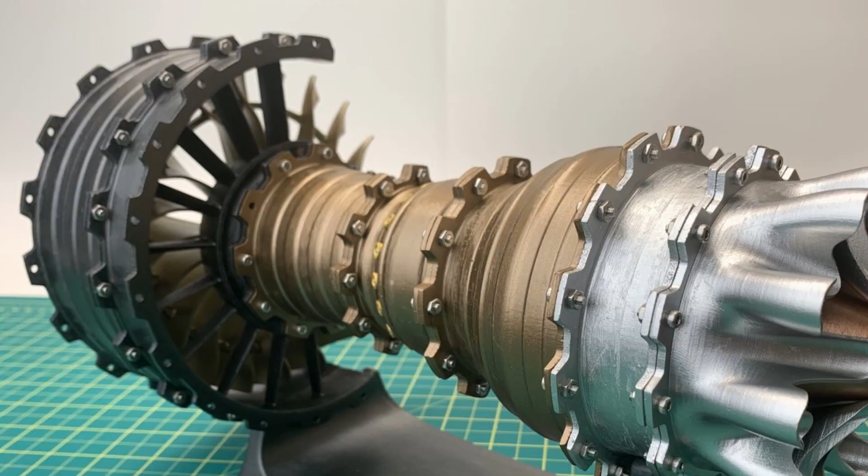You know what's better than a big model of an airplane engine? A cutaway model of an airplane engine. And you know what's better than that? Well, that would be a working model of an airplane engine. But hold on. I gotta show you how I built this thing.

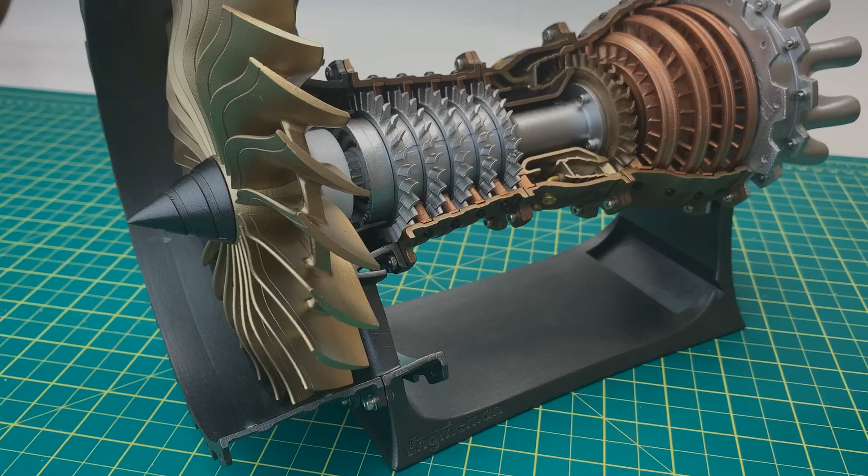When it comes to building models, obviously, I like building model airplanes the most. And my favorite part of the build has always been the engine. And I've built quite a few of them. Yep.

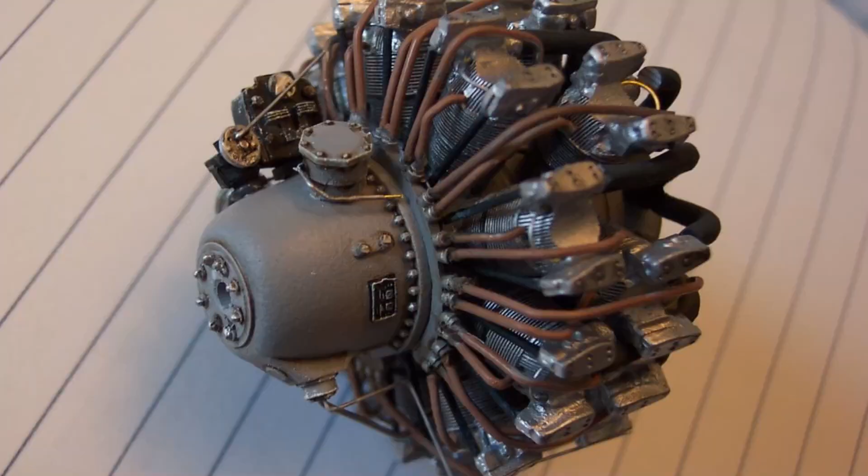Yeah, yes. And this is probably why I was approached by StirlingKit.com and asked to build this working 1/20th scale model engine. What I like the most about this model is that it's a cutaway and it's designed to show what's going on inside the jet engine. It really reminds me a lot of those open engines you see in air museums.

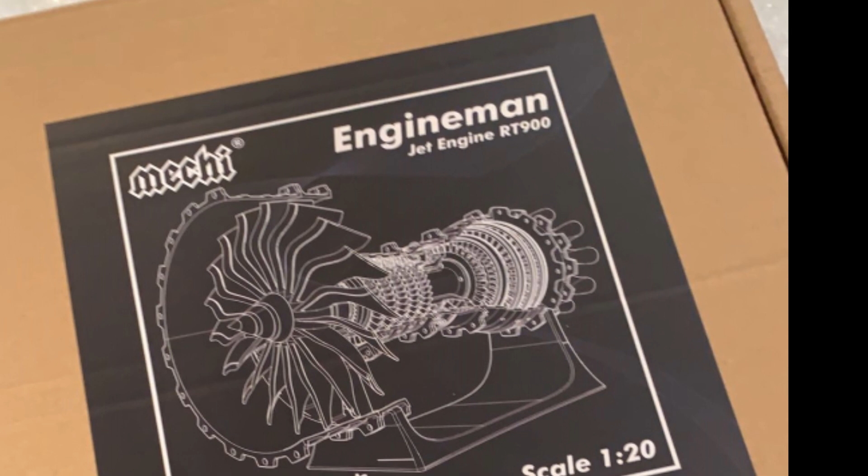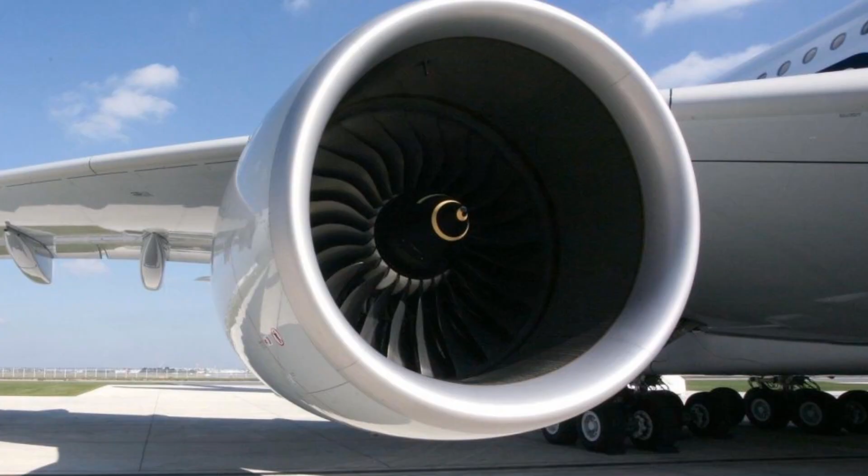This kit is called the RT900, which I think is short for Rolls-Royce Trent 900 or the Rolls-Royce Trent 900 jet engine. And here's the real thing. Now, I'm not an expert on high bypass turbofan engines, so I had to go on the interwebs to find out more. And you'll find 4 of these big boys on that gargantuan Airbus A380. You know, the big double-deck airplane.

As an aside, I actually saw one of those A380s on a recent trip that I took. It sure dwarfed the puddle jumper I arrived on.

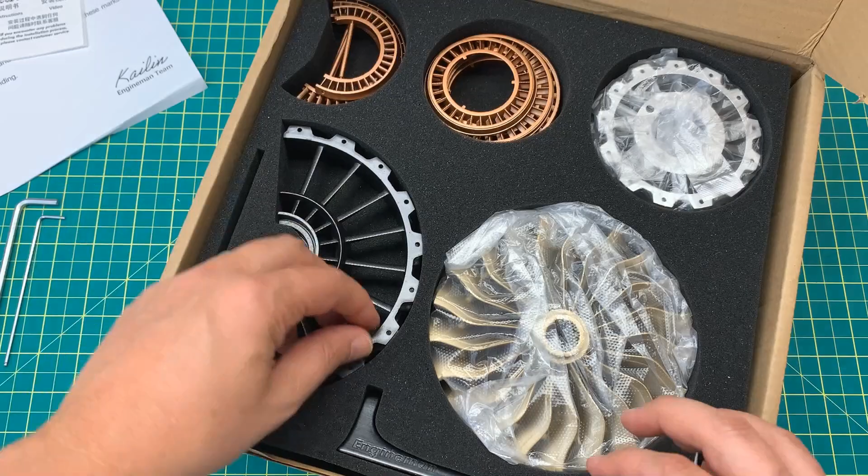StirlingKit.com shipped me this kit direct, and let me tell you, the packaging is the truth. Every part is individually honeycombed in foam, and all is housed within a thick cardboard box. Nothing was broken on my example. I don't think it'd be even possible to break a part. And if I had to estimate, I'd say this package could survive a 3 megaton near miss.

And everything is in there. The engine parts, fan blades, a little electric motor, and a lot, and I mean a lot, of nuts and bolts. As expected in this day of IKEA, this kit includes both types of Allen keys or Allen wrenches, if you will. And rather unexpected, there were 2 very helpful 3D printed tools designed to hold a few of the many nuts that are going to be used to construct this engine.

The only thing missing was printed instructions. Although, not to worry, there are 2 of those boxy scanner code thingies you can target with your phone. Those will open links to digital instructions and an assembly video. Now, I'm of 2 minds on this. On one hand, I'm old school. I like paper instructions. I like looking through them, marking them up. I don't know. It's just the way I'm used to building a model, so I printed my instructions.

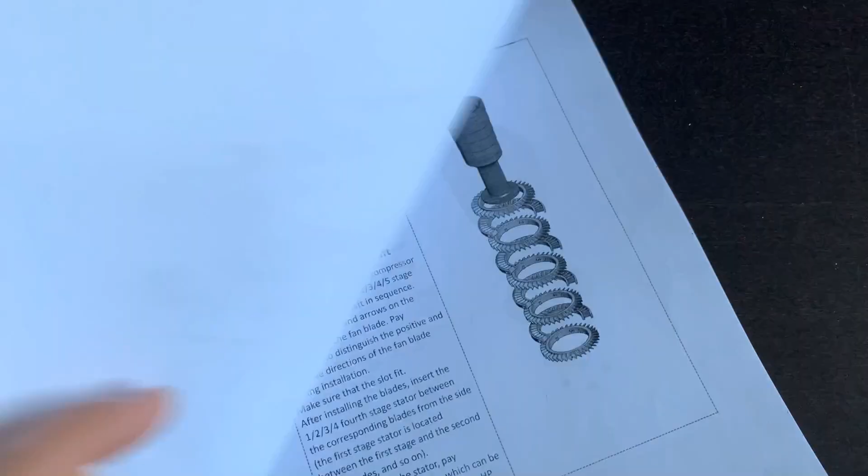But on the other hand, I get it. Once the build is over, paper instructions are usually discarded. At least around here they are.

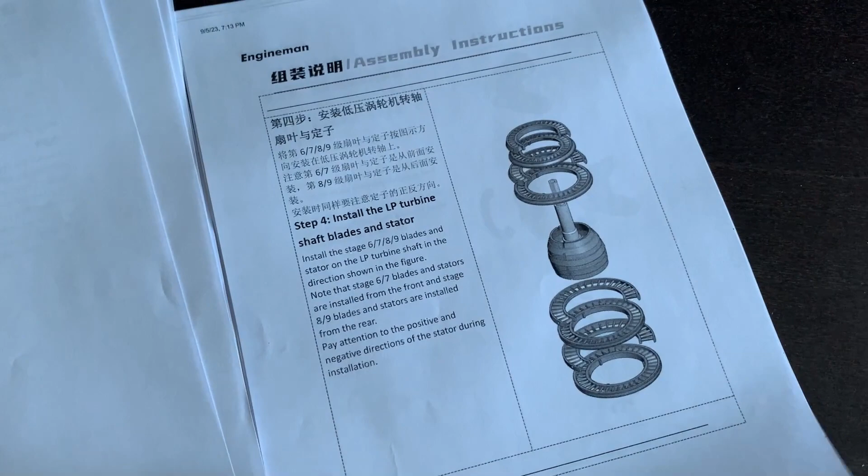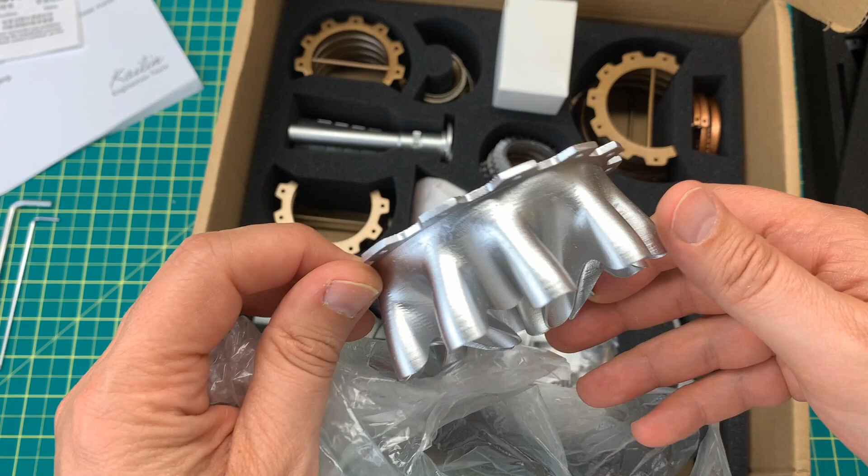Once I got the parts sorted out, the build goes rather quickly. Most of the parts require 0 cleanup, and I highly recommend smoothing out the parts that you do require to snip here and there. You don't want anything to catch on this working model, so a little extra care with the nippers and a knife will go a long way.

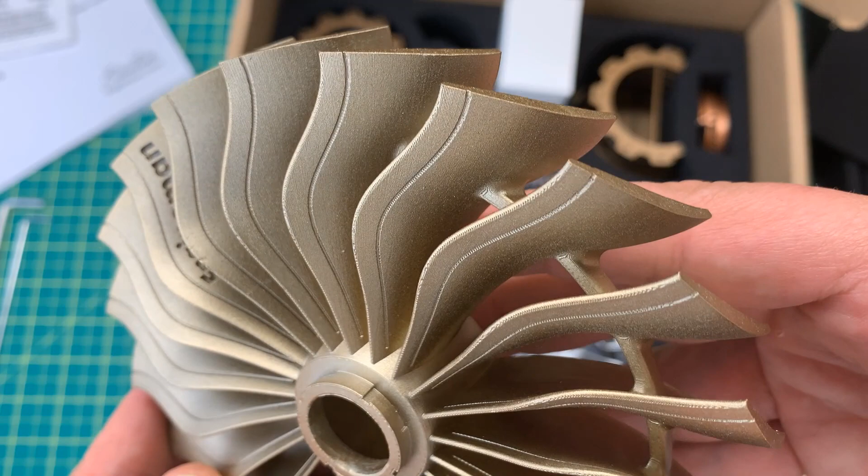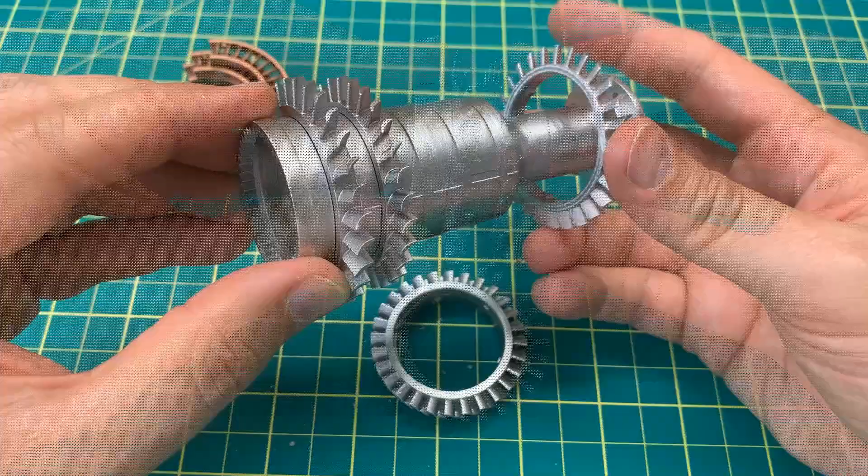There are about 13 steps in the construction of this engine. Basically, you start by building up several sub-assemblies and then you gradually line them up and bolt them together. Starting with the compressor section, I aligned the numbered parts, I slipped them on the spindle, and they slid into place. These 3D parts were a snap fit, and they held in place much better than I expected. In fact, I didn't use glue at all for this build.

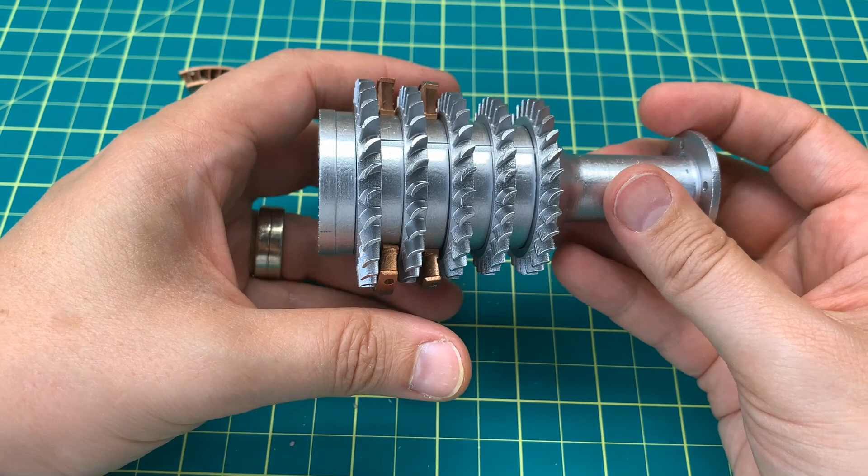And I did make a couple of mistakes when building, but since the sub-assemblies come apart easily, both mistakes were easily corrected. When I first opened the kit, I could swear the parts, or at least some of them, were metal. And actually everything except for the fasteners and the little electric motor is 3D printed and painted in different shades of metallic paint.

Being the first 3D print kit, I learned a couple of things while I built it. When I had to nip the parts, I found the plastic was both tougher to cut and more brittle than the styrene I'm used to. If I had a little imperfection where I used the nippers, sanding them was also a little difficult to do, so I went with my trusty scalpel blade.

Again, the plastic is not easy to cut or shape, so I took my time and carefully cut those stray bits here and there. That said, the parts were durable and all had a very good weight to them.

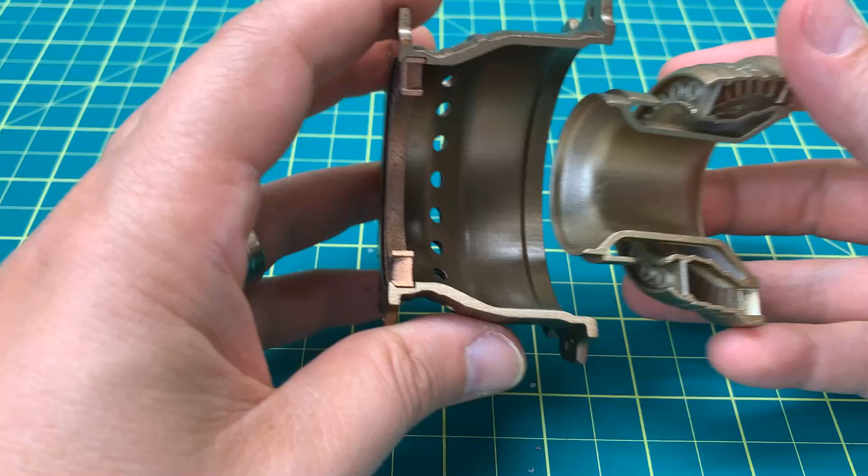The combustion chamber was a really nice piece of 3D design and printing. There are two C-shaped pieces that slide perfectly into their slots within this assembly to complete it, and then the fuel jets simply snap into place. All very cool—I was very impressed with that.

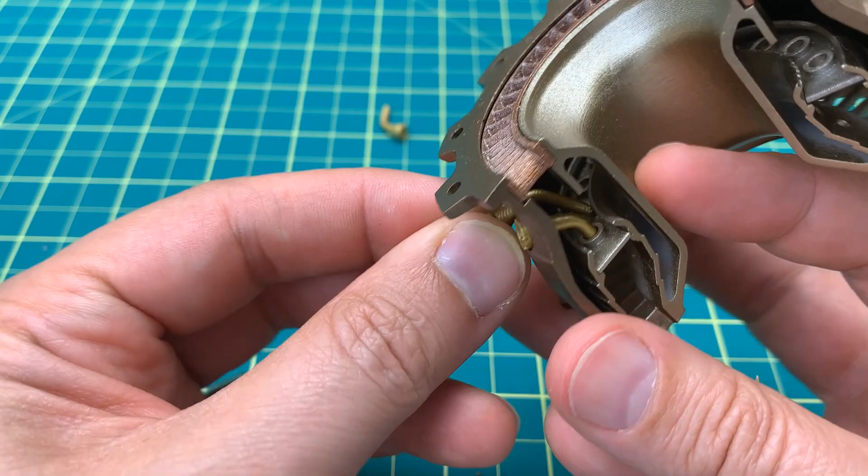Then I started building up the sub-assemblies into the jet engine. The fan sections slot into their housings and are pinned into place, and then these sections are stacked one on top of the other with smooth running ball bearing cartridges. And that is where the nuts and bolts got serious.

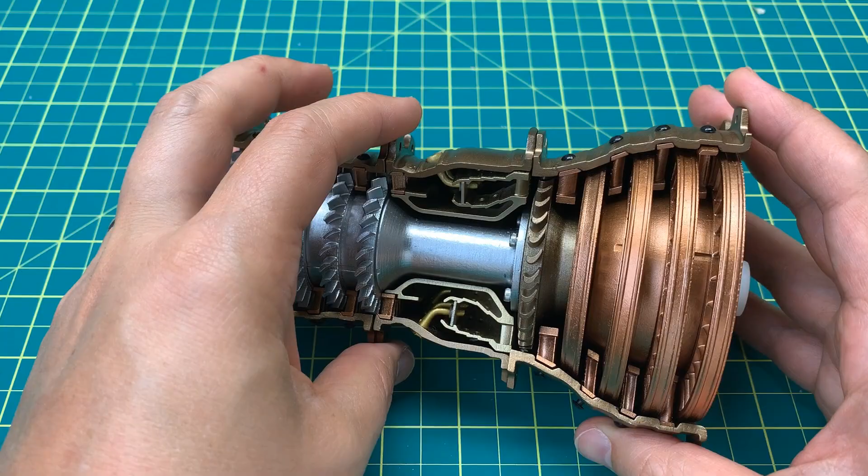I'm telling you, there are a lot of them, and once they're all on, there's no way this engine is ever going to fall apart. I guarantee it. Most of the time I was able to just hold the nut in place with one finger and twist the bolt in with the Allen key, but there were spots where I made use of those 3D printed tools to help keep the nuts in place. Once I got into a decent groove, this part of the build went really quickly.

The little electric motor mount is also a neat piece of 3D printing. Again, without any glue, everything locks firmly and precisely into place, and it's very solid. So again, I was very impressed with this aspect of the model.

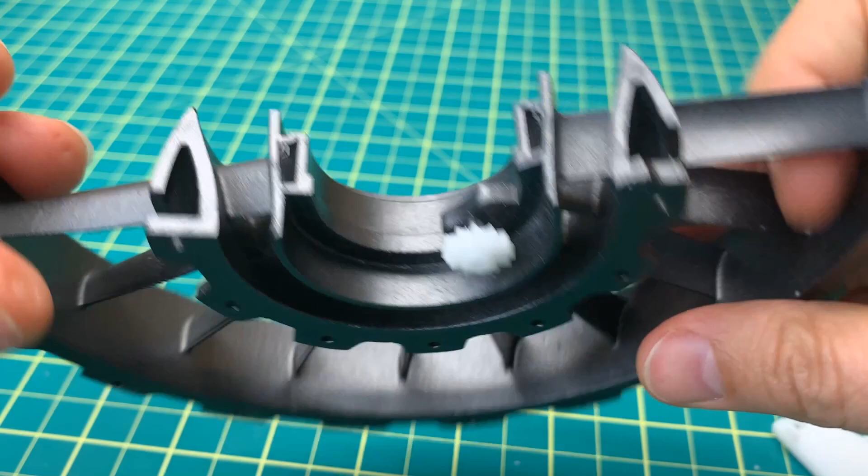Truth be told, since most of the parts come detached and cleaned up for you, the model goes together very quickly. I could have built the entire thing in an evening without much trouble, except when I got to the second-last step. There's a 3D printed gear that's supposed to turn freely on a post under the fan housing. Unfortunately for me, mine was printed a little too small, or to be more precise, the opening was just not big enough to fit on the post.

And of course, Murphy's Law—that night I did not have the correct drill or drill bit on hand to open it. So after a quick trip to the hardware store, I carefully opened the hole using a 9/64 drill bit. I say carefully because I wanted it to spin freely but not rattle around on the post and get bound up in there. But once the gear was properly in place, everything else went together with even more bolts.

And there you have it, all done in a couple of evenings. On its own, it's a very attractive model of a jet engine, and better than that, it's one that's cut away to show off the innards. The size is just right for a desk or a bookshelf model.

Like I said earlier, I love building engines on my airplanes. Now, the purpose of this model is to show how a passenger jet engine works, rather than to be a 100% accurate reproduction of a Trent engine in 1/20th scale.

So, speaking of which, let's flip the switch and see if this thing works or not. Hey, there you go, it does. I love how the front and the aft turn one way while the compressor blades turn in the opposite direction. I suspect that's how the real thing works.

And I tell you, the little intern really loved this kit and even showed it off to her friends.